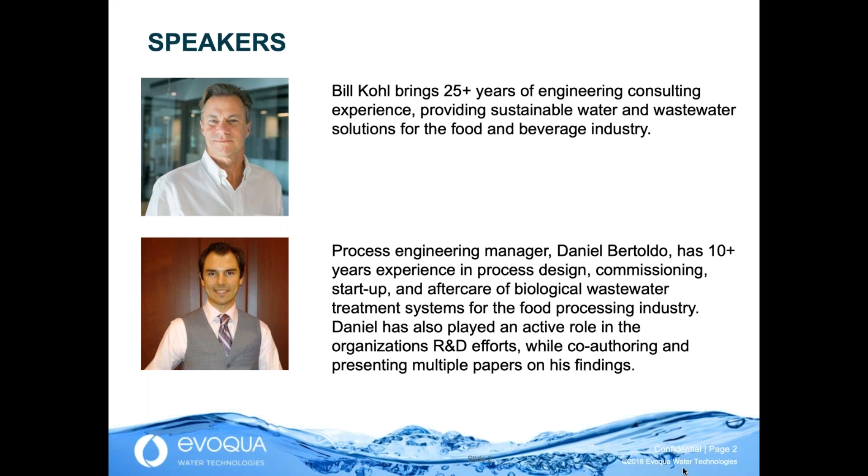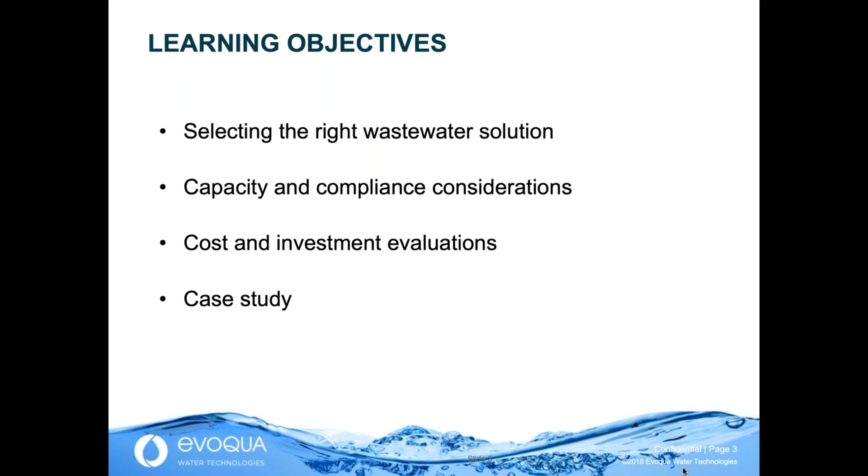Over the course of this presentation, we're going to try to offer you some thoughts on evaluating wastewater treatment options and finish with the aforementioned case study for New Belgium Brewing. We're going to presume that you have a basic understanding of wastewater treatment, and for those of you that have more than a basic understanding, please forgive the oversimplifications that we're using for the illustrations today. We're going to be discussing wastewater technologies only at a very high level. The intent of the presentation is to give you some concepts and some ideas on how to select what's best for you in your situation.

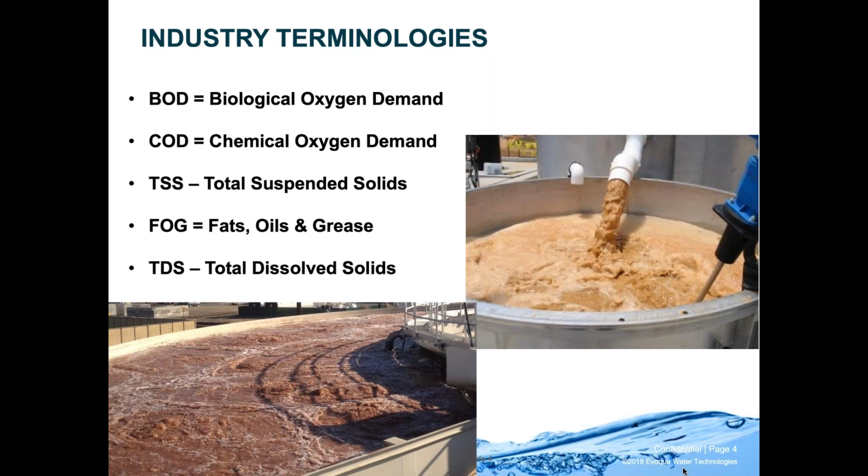Just briefly, I'm assuming that most people on the call understand this terminology, but here's just a little reminder of some of the acronyms that we're going to be utilizing today. So wastewater, I think most people are aware that it has these following impacts. Unfortunately, it's not the favorite topic for investment purposes in a facility, and that's understandable. You want to invest money in the production side of things, not the wastewater side of things. Often it's only dealt with after it needed to be, so you're already struggling with the wastewater treatment issues if it's an existing system especially.

So we're going to give you some thoughts on how to basically evaluate costs when looking at a new system or an existing system, how to extract whatever savings you can from the treatment systems and become a hero, take the savings, turn it into a bonus for you.

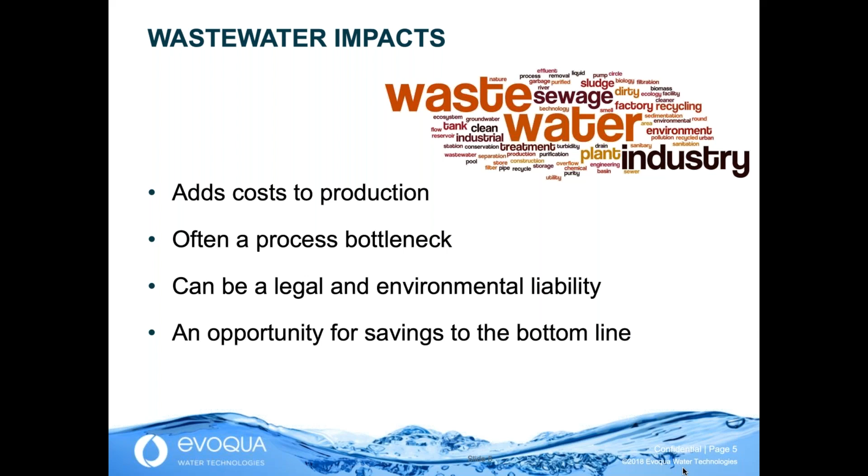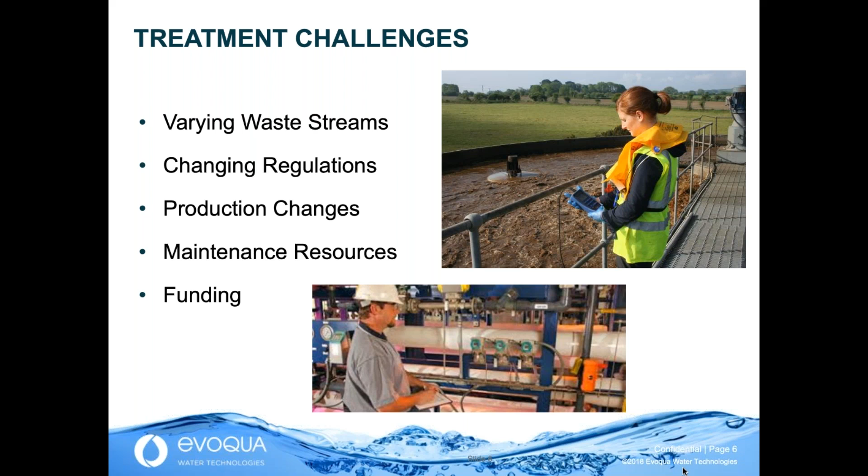Now, with wastewater treatment plants and food processing facilities, there's a variety of interesting challenges. The production changes, there's CIP cycles, there's unknown spills and chemical additions when something is changed in ingredients or sanitization chemicals, and of course, getting funding to make any improvements is a challenge as well. We're going to try to help you with some of these things.

So when you're evaluating options, basically you've got a new installation or you've got existing installations. We're going to try to address both of these, but which one you have makes a difference in how you look at it. Obviously, a new installation, you can do things right the first time.

Existing installations, you may be constrained by what equipment you already have or what the site conditions are. There may not be space, etc. In addition to that, there's a growing emphasis on operations as well, making the operations as efficient as possible as far as byproducts, waste, energy, labor requirements, things of that nature. So we'll talk a little bit about automation and a little bit on outsourcing some functions that may be specialty, so you don't have to know everything about your wastewater treatment system, just enough to keep it running each day.

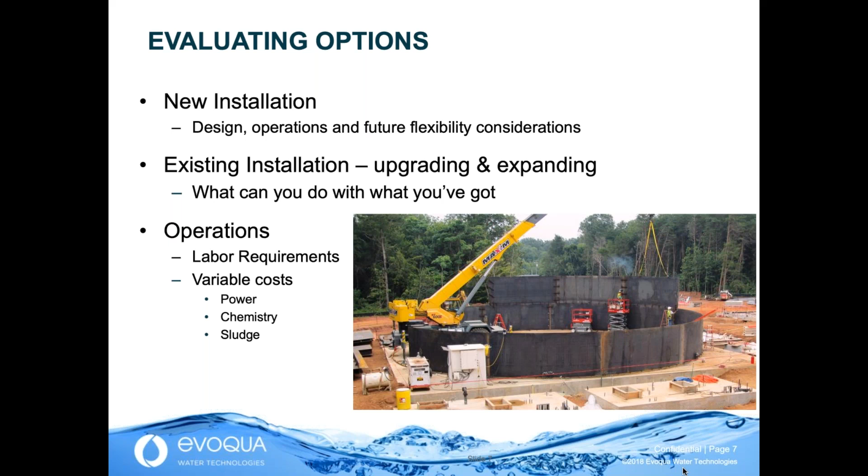So design considerations are going to take into account things like where are you discharging to? Is this water going to a municipal wastewater sewer? Is it going to a surface water discharge? How much room do you have? Is this going to be a facility that has the potential to grow in the future? What kind of product change-ups are you going to have? And of course, it comes down to money as well. What money do you have available? What labor do you have available?

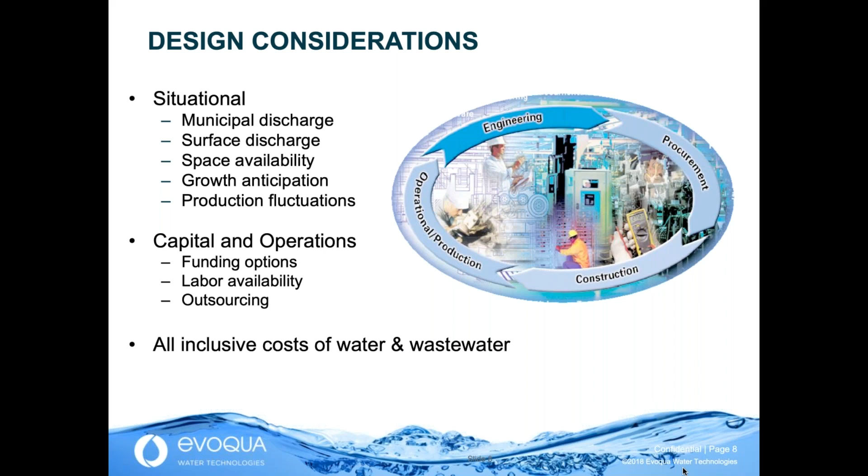That's increasingly tight. Are there some considerations where you might be able to outsource some or all of the operations and the capital equipment? Where we start with all of that is trying to recognize what are all the costs that are going to be associated with the water and or wastewater treatment system. So on that front, the more data that we can collect before we start evaluating wastewater treatment systems, the more informed and better choices that you're going to have. So things like a mass balance throughout the facility, wastewater analytical data, obviously. Operational costs at the various steps where you're modifying the water, impacting the water in some way.

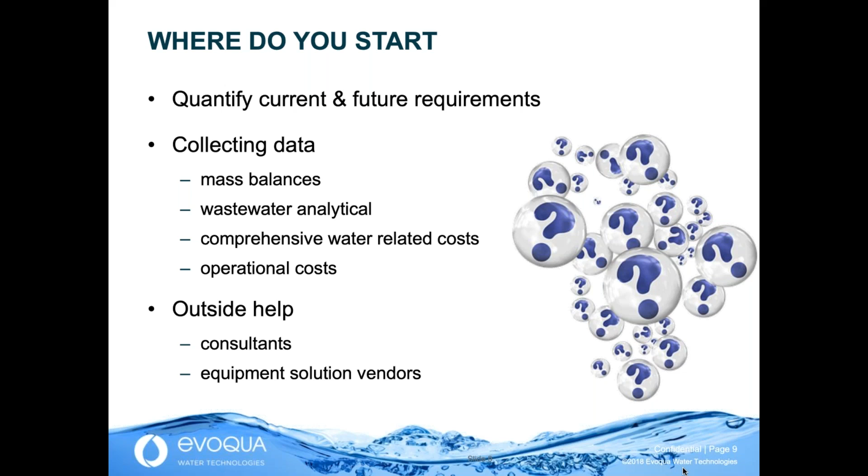And you're not expected to know how to do all of that or where to look. So there's a lot of help outside available to you in the form of consulting engineering firms. Equipment solution vendors can do a lot of this as well for you, and sometimes they're teamed up with the consultants to help provide you the data and the information you're going to need to justify what's best for your facility.

So when we look inside the plant, many of you will recognize that water is everywhere. But everywhere there's water, there's also a cost associated with this. Anything from adding heat energy and chemicals at the boiler treatment steps, or the cooling towers, also a chemical treatment, and there's a lot of wastewater that comes out of a cooling tower, things of that nature. Also the lab.

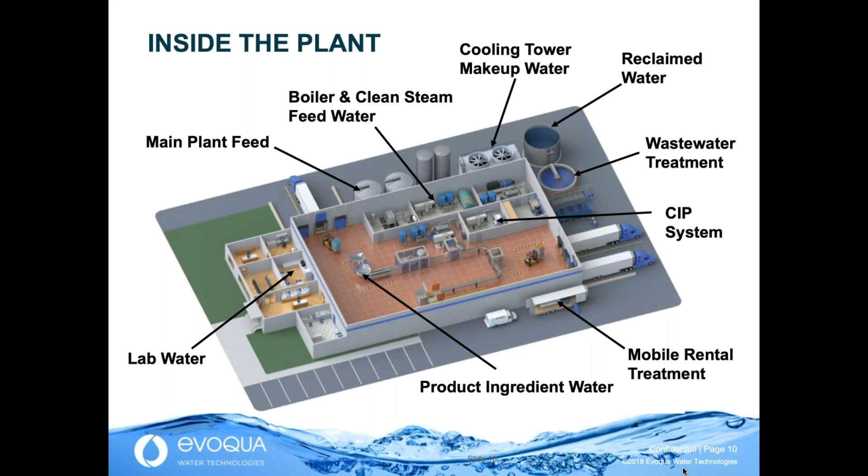So if you look in more detail within your facility and start blocking off the major water users, the major destinations for the water, the uses of the water, the ultimate disposition of the water, and the byproducts of the water, this is a good template to utilize to say, okay, these are the areas that we need to at least take into consideration for what's the cost of my water at each of these steps, and where are there water reuse opportunities. It might be point source water reuse.

For example, we could take the cooling tower blowdown water, treat it, send it back to the cooling tower again, and avoid having it go to a wastewater treatment plant, ultimately shrinking the size of the wastewater treatment plant. Why would you want to send cooling tower water to a wastewater treatment plant if you could avoid it? That takes a lot of volume out and potentially a lot of cost.

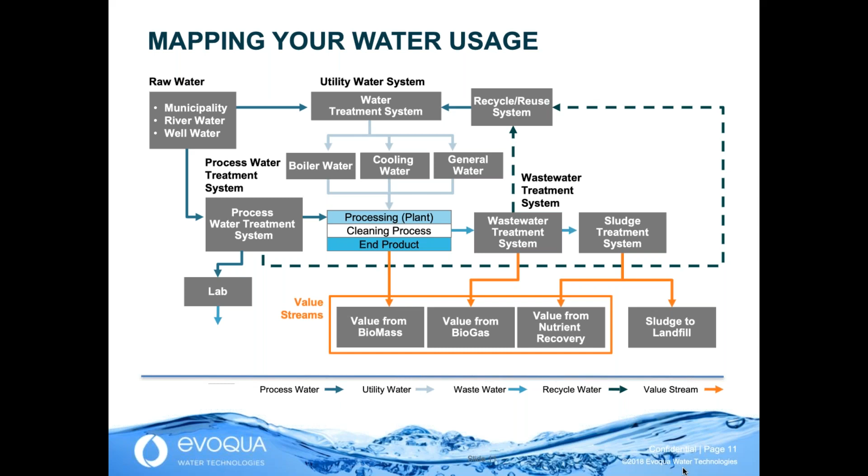So when you're looking at the cost, just to reiterate, look at all of the aspects of the water coming in, the water going out, not just what the meter says on the front end and what the sewer bill is on the back end, but add in the other costs, including labor associated with these various steps. And this will give you a comprehensive picture when you're justifying the type of wastewater treatment system you're going to use.

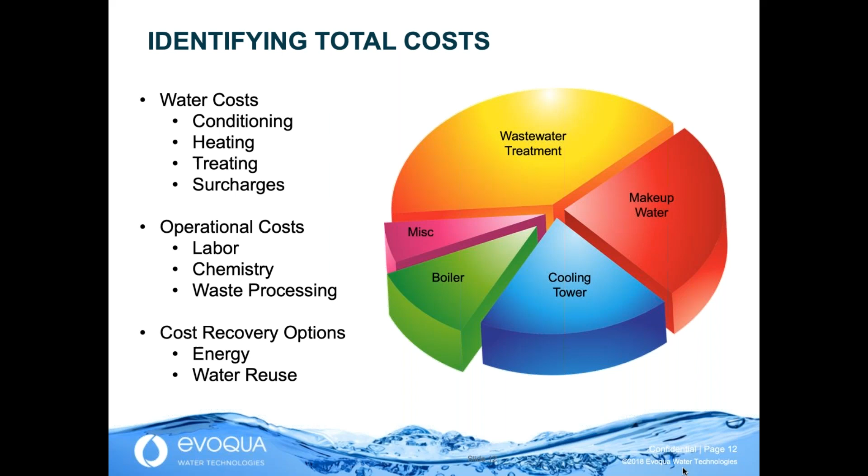We keep talking about the type of wastewater treatment system, but in reality, there's a large number of technologies that can go into a water and or wastewater treatment system. Unfortunately, or fortunately, most of them will work to get you to where you need to be.

There isn't one solution, unfortunately, that fits everybody. It's a little easier on the front end process water side, but on the back end, on the wastewater side, there's so many different variables that have to be taken into account in the constituents in the water, the temperature of the water, the fluctuations of the water flow, et cetera, that there just isn't one size fits all.

So since there isn't one size fits all, we're going to try to give you some examples on how to compare the various options to make the best choice for yourself. And it won't be the same for every industry even. It's really site specific, it's client specific.

So we're going to talk about some of these technologies, but we're not going to go into detail on any of them. This isn't about how these technologies work. It's more of, here's some different examples of what would work in a given situation and how we compare which one is potentially best for you.

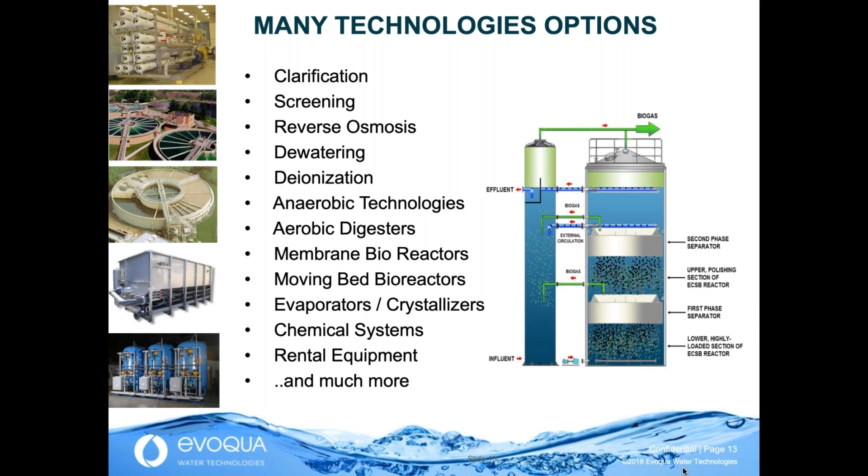So I'm going to break these down into real basics. All those other technologies that were on the previous slide can generally go into these four categories. There's physical processes, which are things like screens or dissolved air flotation, media filters, membranes, things that are basically physically taking solids out of the water typically.

The biological side of it is taking out the dissolved organics that the physical processes don't really impact. So essentially, this gets digested by microbes. We're going to get into that in a little bit more detail, and that's going to be the focus of a lot of the rest of our discussion here.

The chemical side, almost every aspect of the wastewater treatment is going to have some chemistry associated with it, whether we're adjusting pH or doing coagulation or doing sterilization on the back end. So you can't avoid having the chemical impact on any of these.

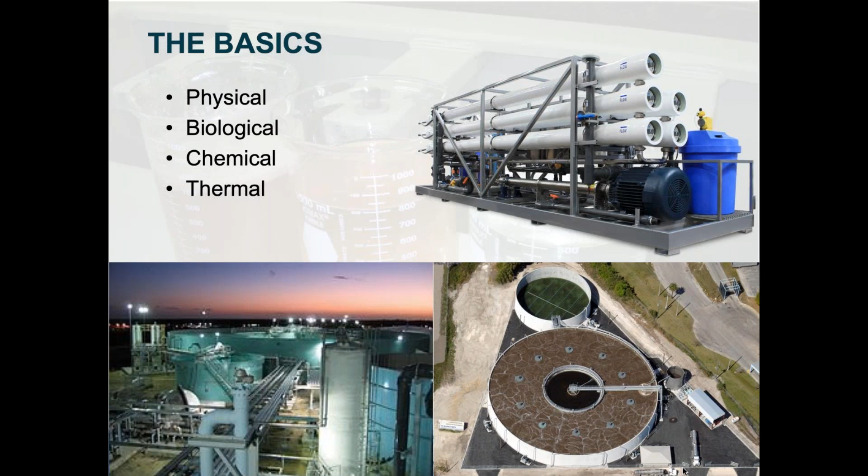Thermal is a bit more on the extreme side. This is basically boiling off the water to eliminate it. So we're concentrating it into a liquid form, or we could take it all the way to solids. Generally not applicable in food and beverage, so we're not going to focus on that, but I just want to make you aware that it is there.

So if we go back to where the different technologies may fit and how to categorize them, we could take a look at this as a primary treatment step, a secondary treatment step, and a tertiary. So the primary is where we're going to be filtering out solids, if we just keep it that simple. The secondary side is where we're going to take it a bit further, and we're going to digest or eliminate dissolved organics for the most part.

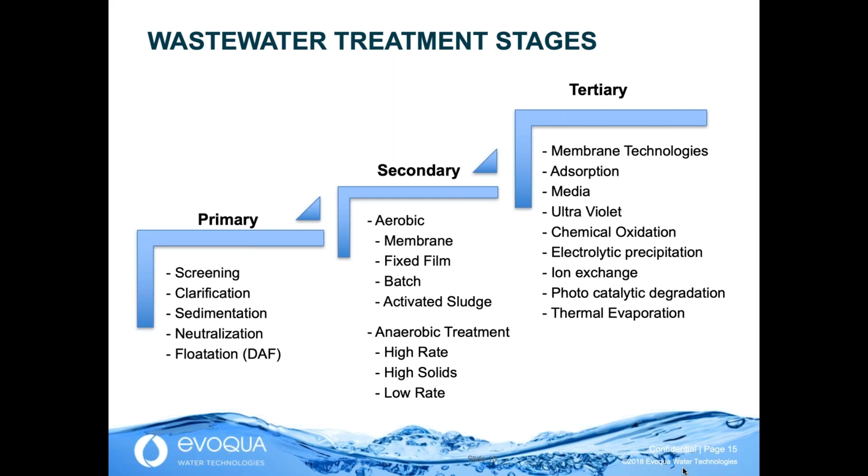On the tertiary side, this is where we're polishing it up. We're either polishing it up for discharge, for reuse, maybe some other beneficial side use, but it's a polishing step. We're not going to spend a lot of time on this today either. We're going to focus on the secondary part, the heart of this, because that's where the biggest impact is financially, footprint, every other aspect of the wastewater treatment plant. Most of the heart of that's going to be the secondary side. So that's what we're going to focus on today.

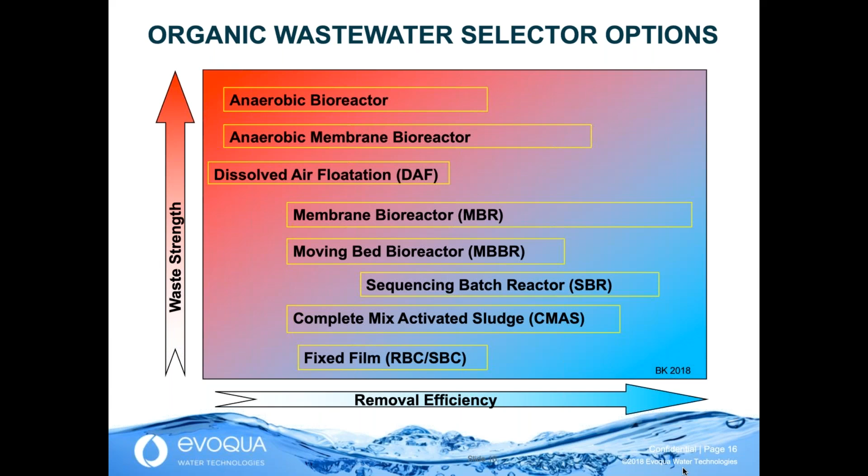And as we go down and to the right, where the cleaner water is, we've got more aerobic or membrane-based systems. And in between there, you'll see that the dissolved air flotation has a spot as well. And you'll see why in just a moment.

I'm going to talk about the primary treatment step. This is going to be part of almost any other process that has the secondary or the tertiary. But often a primary treatment step can be all you need for your wastewater treatment needs if you're going to a city discharge. So primary treatment, taking out suspended solids, but it also takes out biological oxygen demand, organics that are associated with the solid portion of what you're removing.

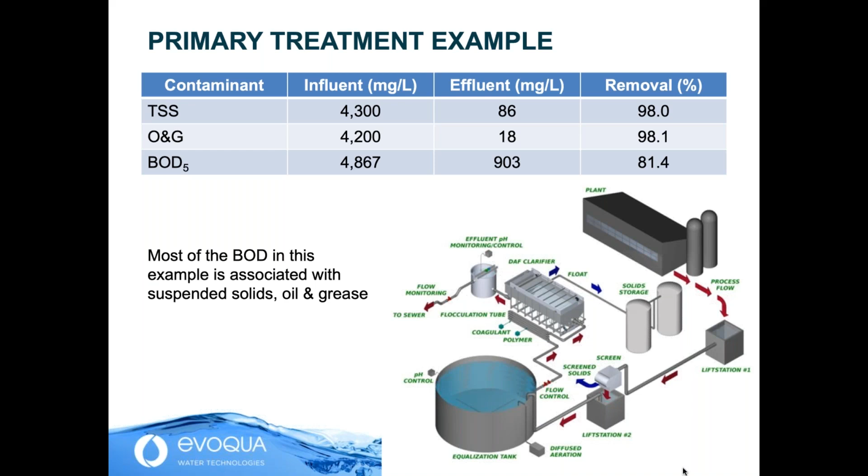In this particular case, this was enough to meet city discharge requirements and, maybe more importantly, save a tremendous amount of surcharges that the city would have been impacting this particular facility with if they had been sending raw wastewater to the drain. So these types of systems typically have a pretty good payback. So if you're not executing something like this now, this is probably the best thing to take an initial look at. These can have a return on investment as short as a year and usually within 2 or 3 years. Fairly simple to operate.

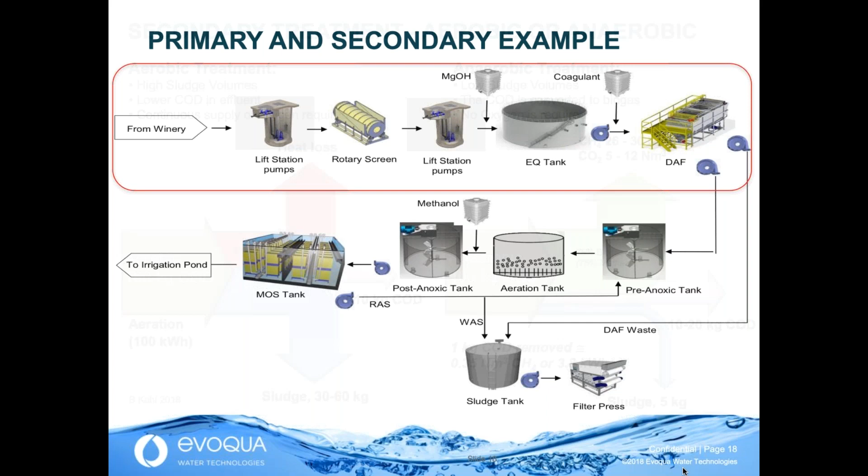These 2 steps would be the workhorse for almost any wastewater treatment process for the food and beverage industry. We're going to focus on the secondary for the remainder of this presentation, since that's where most of the money and most of everything is being spent and utilized. So I'm going to talk a little bit about 2 basic types of secondary treatment on the biological side. We've got the aerobic, which, as its name implies, uses air. And essentially, we are taking aerobic microbes, giving them food and air in some type of a tankage. We've got them contained. And what they're doing as a result is they're consuming the soluble organics and turning it into sludge and turning it into carbon dioxide.

The other approach is anaerobic. Anaerobic doesn't require air, and as a result, it doesn't require as much power. And as another consequence of anaerobic technology, it also produces a lot less sludge, and it produces a beneficial biogas. It's beneficial if you can reuse it in boilers or produce electricity or a number of other uses we won't get into at this time. But the reason I bring these up is we're going to compare these in a couple of examples coming up here on how to decide what's best for you.

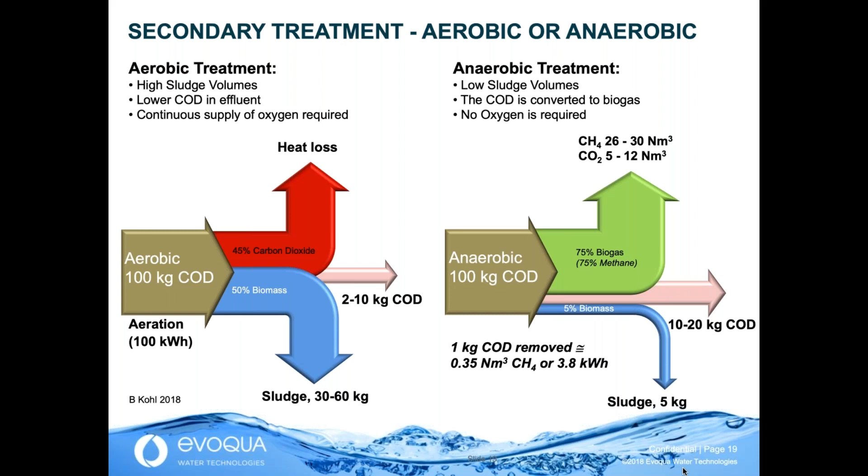A variation of that, especially for industrial applications these days, is something called a moving bed bioreactor. It's basically a fixed film. It just means that we're now pouring places to live for those microbes into the same type of tank as the conventional activated sludge. So think of honeycomb cereal being poured into a big tank, and now biofilm can form on those surface areas, allowing a much denser population of aerobic microbes.

And the benefit for an industrial application is now we can make this more compact. And we don't have to send the bugs back from the clarifier back into the swimming pool because they're already hanging on that fixed film media. We still need some type of clarifier or dissolved air flotation at the end, and we'll see that in upcoming block diagrams, just to capture the dead bugs, because we don't want them going down to the next step in the process, whether it's going to the sewer or tertiary polishing.

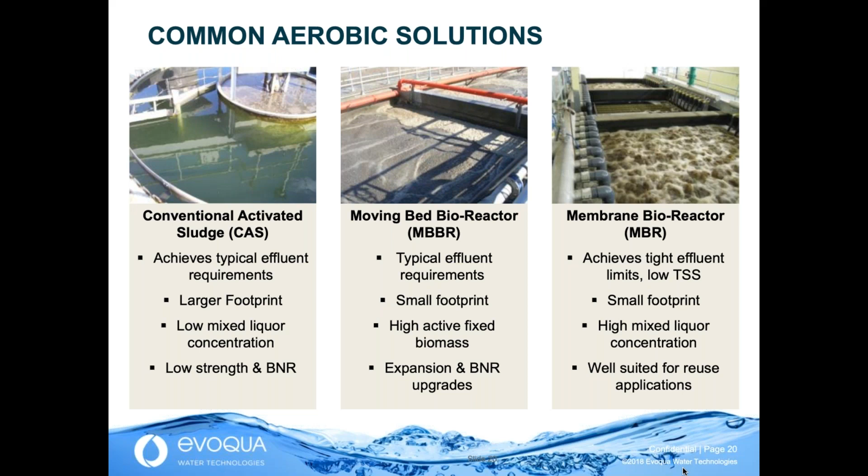And then another variation of this is just to put a membrane where the clarifier or the DAF would be. So now you've got that open swimming pool concept, but instead of a clarifier or a DAF, you've got a membrane that's holding all the bugs in. And as a consequence, we can keep more bugs in a smaller space. So like the MBBR, this is also a smaller footprint than the conventional activated sludge. A little bit more expensive because of the membranes, but you get better quality water that might be more suitable for reuse, and we're going to talk about that in a little bit.

On the anaerobic side, again, an oversimplification. We've got high rate anaerobic, and what that means is that the water retention in that system is a very short period of time, usually just a few hours. Consequently, it's a very small footprint. It has to have the water very conditioned in order for this to work, meaning we can't send it high solids, oil and grease, things of that nature. We need to control the operating parameters within a very narrow range. So it's not very forgiving, but it's very compact. And if you don't have space, that might be your only choice.

If you do have space, a medium rate reactor where the water retention time is longer can handle higher solids, higher FOG. It's more forgiving, a little bit easier on the operation, but we have to have something to catch the solids like the conventional activated sludge and send them back into the process.

The low rate system takes a larger footprint because it has a higher retention time, but it's the most forgiving of the three. It can operate in the broadest range of any of those anaerobic technologies, including taking high fat, oil and grease, high suspended solids. It often can be the only step in the process, not requiring any pre-treatment, not requiring any post-treatment like a DAF. So we're going to talk about that a little bit further.

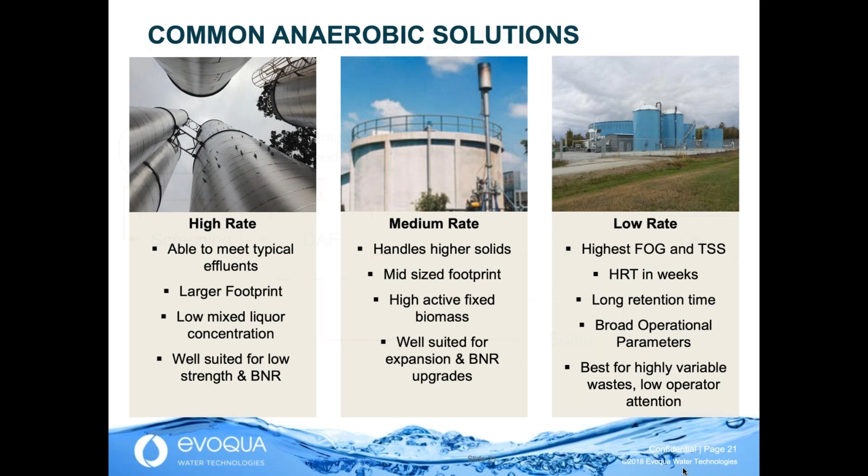So if we go back to the primary expansion or primary treatment that we talked about before, that a lot of existing facilities may already have, especially for a city discharge, that included the screen and a DAF, an oversimplification here. Often what will happen is you've increased capacity at the plant or production. You're no longer meeting the city requirements, or the surcharges have increased, or the limits have dropped. So what can we do?

The good news is you can add one of those processes, in this case an aerobic MBBR, the moving bed bioreactor, followed by a DAF, and certainly meet the city discharge limits. It might be a new phosphorus limit that they've imposed for you, or they've lowered the level at where they're going to start charging surcharges, or they're just asking you to reduce because they need additional capacity within their facility. So they're asking the industries to do further pre-treatment. This is a relatively simple add-on. These are typically modular, so you can expand them in the future.

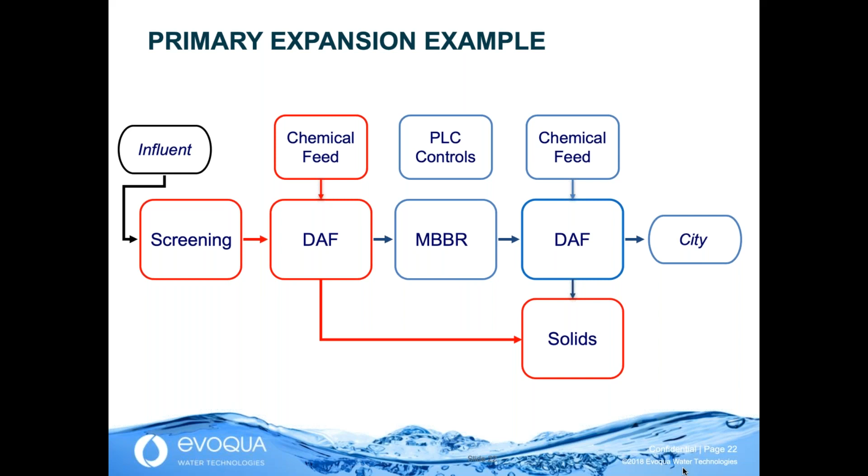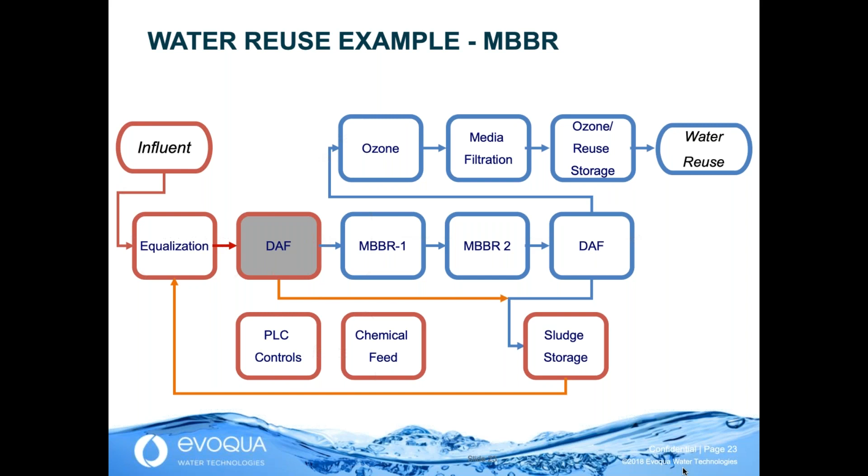An easy choice. If you wanted to take that concept a bit further and reuse some of that water that you're now cleaning up, we could further polish that water with an additional moving bed bioreactor, followed by the DAF that we had in the previous example, but at this time now start sanitizing it with some ozone, use some media filtration or a membrane to further clean the water, and then use it for reuse. Could be boilers, cooling towers are commonplace, truck washes, things of that nature.

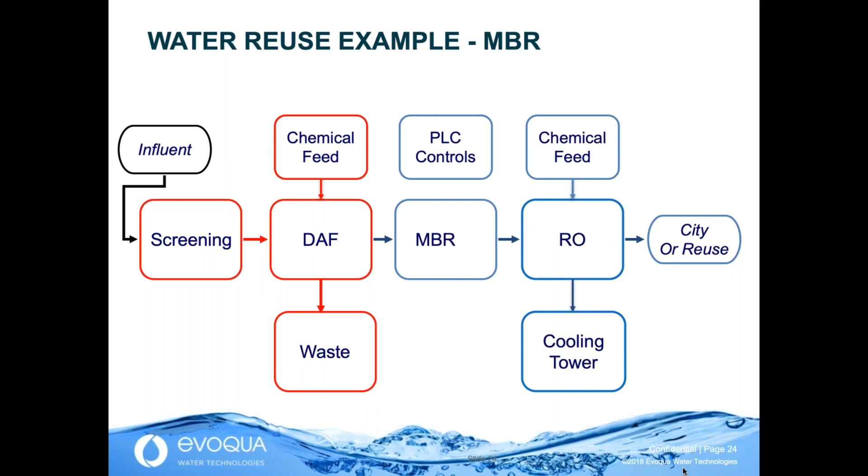Another example of that would be to utilize the membrane system, the membrane bioreactor. This allows you to utilize the water directly to an RO, for example, which would be very suitable for almost any use within the facility.

Now let's take a look at those three on a comparison chart, just in some very basic aspects: their footprint, the amount of sludge they produce, and the energy required to operate each of them. There's certainly a lot of other factors to consider, but if we just kept to these three for illustrative purposes, you can see the total area in yellow above there that the MBBR, in this case, the moving bed bioreactor, actually has the smallest footprint. Okay, big plus for that.

The membrane bioreactor comes in next. The conventional activated sludge is always going to be the largest because, again, remember, it's that big swimming pool followed by a big clarifier to catch the bugs and send them back. So we need a lot of room.

The second thing we're looking at here is how much sludge is being generated. The amount of sludge generated is going to translate directly into a cost because obviously that sludge is going to have to go somewhere. Typically it gets dewatered, and the extent of dewatering really depends on the disposition of the sludge. Is it going to be land applied? Is it going to go to a landfill? Are you going to incinerate it? Those are all factors that add some variation into what might be best for you.

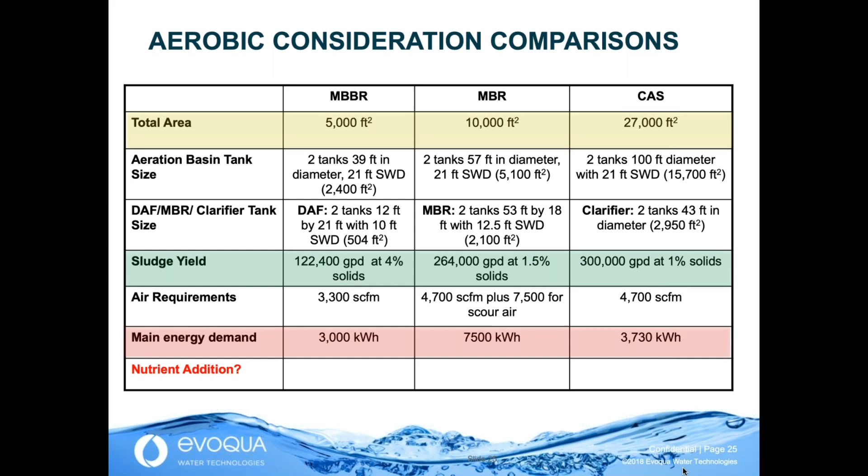And then, of course, the power consumption. You can see that in this case, the MBBR came out a little less than the conventional activated sludge on the right. The membrane bioreactor has more; there's more pumping involved in a membrane bioreactor, and there's some scrubbing involved. That involves input of a blower typically.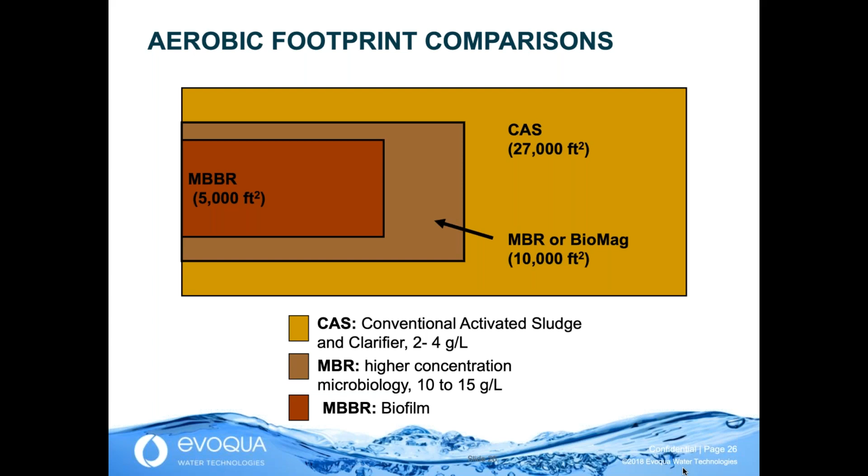Also, when you just compare the footprint on a very simplistic basis, this is what it looks like visually. So in this case, this particular client was looking at initially putting in a conventional activated sludge. Until they did the comparison, they ended up putting in the moving bed bioreactor. They might have gone with the membrane bioreactor had they had an advantage for water reuse, but in this case, they did not.

So let's look at another real-life example that might be relevant to some of you. There's a client that has a 70,000 gallon per day discharge going to a city. They've got an influent to whatever the treatment plant would be of about 1,500 ppm of suspended solids. The city is going to require 300 ppm. The influent BOD is 6,000. The city is requiring 500.

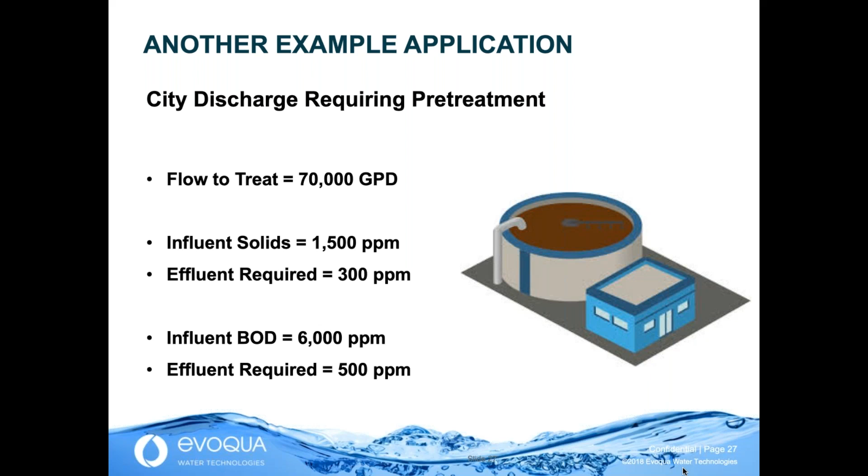In this particular case, the city wasn't giving them a choice. It wasn't that, I'll keep discharging and we'll just charge you surcharges. The city is a smaller municipality. They needed the capacity, so they didn't have to invest in expansion themselves. So they're going up the pipe to this particular industry and asking them to do some additional pretreatment. So they too looked at three particular options for meeting those discharge requirements.

So here's the familiar moving bed bioreactor in a little more detail than the overly simplistic one we looked at earlier. So we've got an EQ tank. We've got the reactor tank, a 55,000 gallon tank you see in the middle. Then we've got the dissolved air flotation to collect the sludge, and none of that has to be recirculated back to the MBBR. It's one of the advantages of that. And then we're dewatering that sludge, and I don't remember what the disposition was, but you could see in the chart in the lower left-hand corner that this is where the performance is coming in with this particular technology.

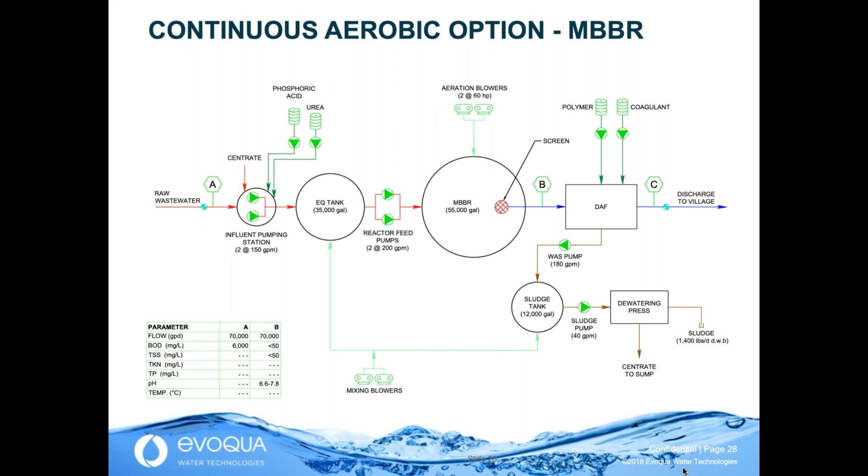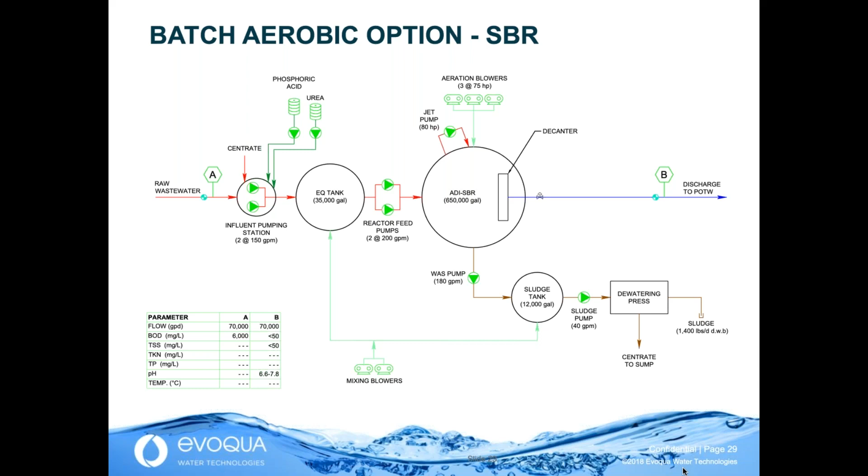And we're going to compare that now to one of the other technologies. In this case, it's a sequencing batch reactor. A sequencing batch reactor is very similar to the conventional activated sludge, except it's happening in batch form instead of a continuous form. So when we look at this technology, we would compare it with a conventional activated sludge. Much larger tank, similar performance.

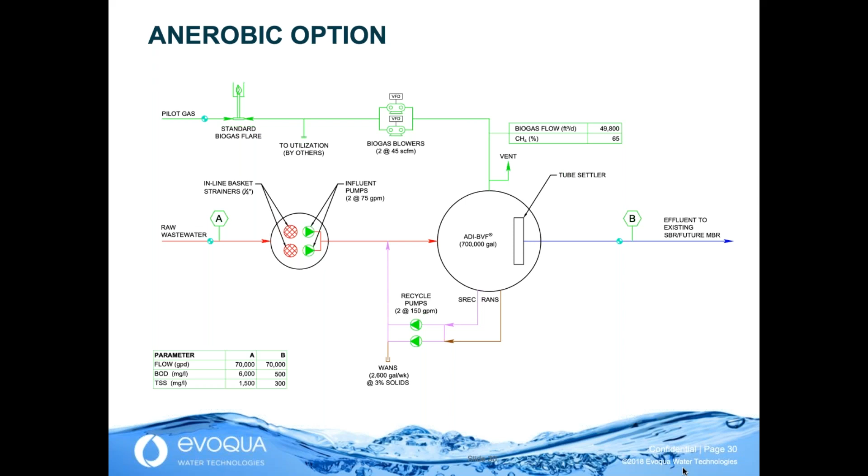And then we also compared anaerobic in this case. And the anaerobic system you can see is the simplest of the three, but it requires a 700,000 gallon tank. In this case, the client had the room for it, so they took it into consideration. Performance characteristics not quite as good as the aerobic, but in this case, good enough for what the city is requiring.

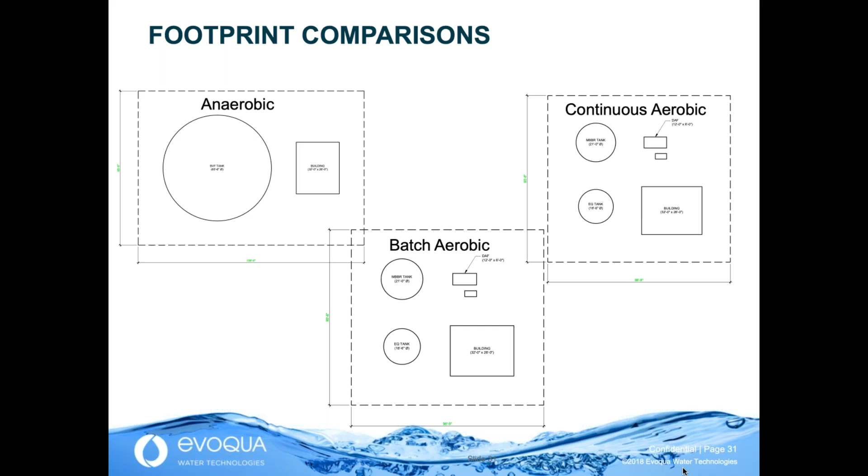The other thing, of course, to take a look at is the footprint of these three technologies, and we can see here that the footprint, you can't read the small print, but trust me, the footprints are relatively the same. The anaerobic in the upper left-hand corner is basically a tank. The batch aerobic is several tanks and a DAF. We need some equalization in this case. The same with the MBBR over on the right.

More importantly, we looked at the operational costs in this case. So presuming that the operator attention is the same for each of these on that upper row, we looked at the electrical requirements, the chemical requirements, and the sludge production to give them, again, an overly simplistic operating cost, not taking everything into account, but taking just the basics.

So if we take a look at the anaerobic in this case, which is what this particular facility selected, their electrical requirements that we've highlighted in yellow here came in far less than the two adjacent ones. You know, we don't have the blowers, so we don't have that electrical cost.

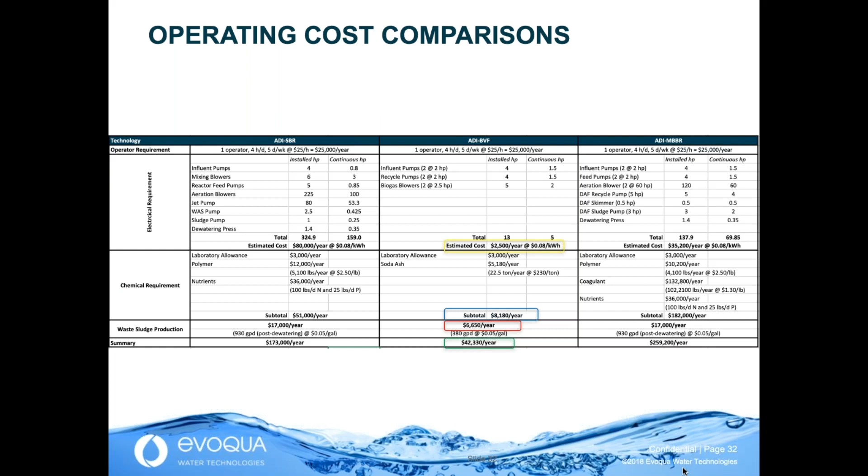Now, the anaerobic system isn't going to win out in every case, but in this particular one, the benefits that this particular client saw was a lot less sludge, a lot less power. They're going to utilize the biogas for their boilers, so they're getting a CO2 offset, and they're getting the value of the saved natural gas. They also liked the fact that it was a very stable process with a large turndown capability. They have outages and they have product mix changes. An anaerobic system can be turned off for weeks at a time. An aerobic system has to be continually fed even during outages.

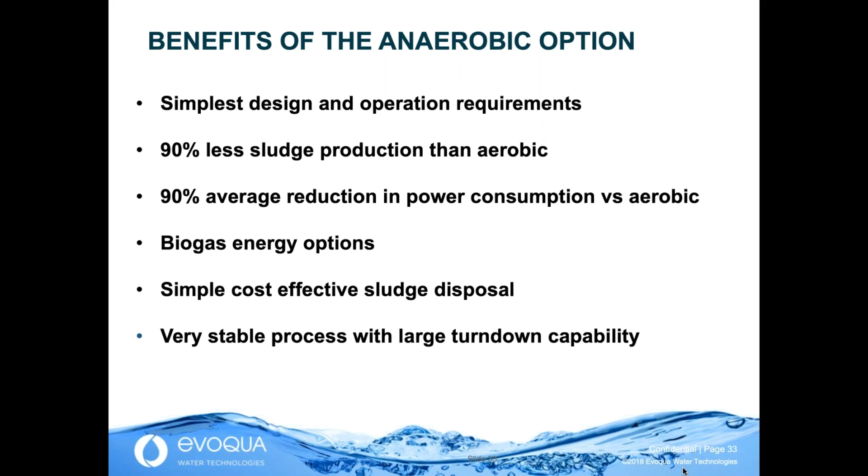So while we're talking on the anaerobic technology, it's also being more and more commonly used to increase the capacity of an existing conventional activated sludge. So if you already have an aerobic system, not just a conventional activated sludge, but any type of aerobic system, and it's reached its capacity, or it needs to handle more future capacity, or it needs to reach tighter surcharge limits, or you just want to reduce the amount of sludge being produced and lower your operating costs, an anaerobic can be a good add-on solution. This can be added in front of the activated sludge system to then reduce the load on the activated sludge system and consequentially the operating costs in terms of 80 or 90%. So 80 or 90% less sludge, potentially 80% less power, et cetera.

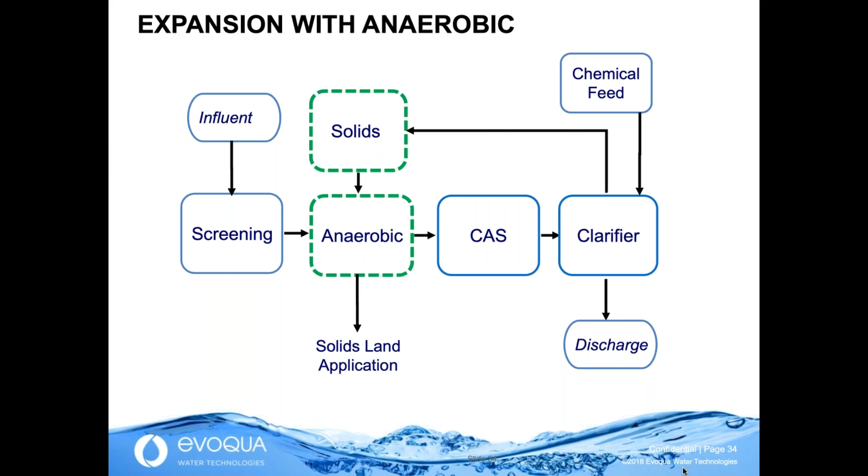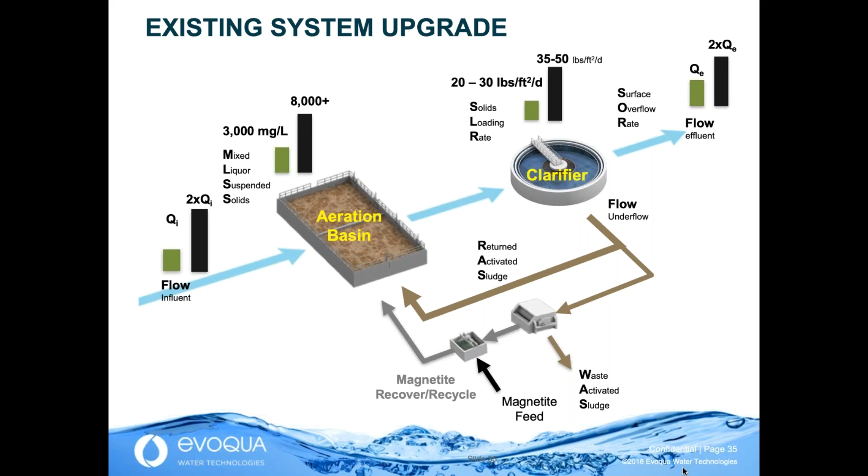Another opportunity to upgrade an existing activated sludge system is to turn it into a ballasted system. I'm not going to discuss the technology here so much as to make you aware that if you have a system now that's overloaded or nearing that, or you need to get better quality water out of it, or your clarifier keeps puking up sludge because it's getting overloaded, you can add on a relatively small technology that doesn't increase your footprint, but it can double the capacity of an existing system, and it can more than double the quality of the water coming out as well. Just another thing to consider with whoever you're dealing with that's going to help you review your wastewater treatment system.

And then finally, just kind of wrapping up here, once you've cleaned the water to a certain degree with a secondary system, you can add a tertiary treatment and take the water to whatever level of reuse that you might want or discharge that you may want. And this is just one example of several ways to do that.

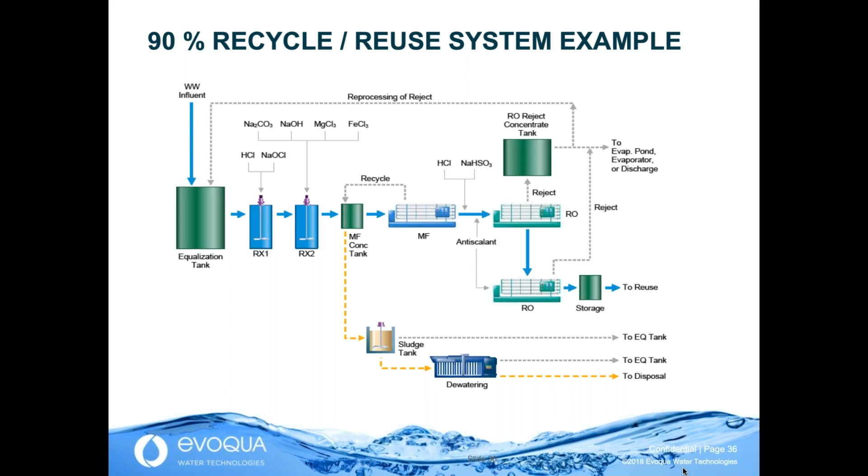So just wrapping up, what we would encourage you to do, first and foremost, is collect as much data as you can, and trending data as well. Anything that you can get over the course of days, weeks, months is helpful to whoever's going to be helping you with the evaluation of your wastewater treatment system. Also, always compare multiple options. Sometimes doing nothing is the best option, but compare as many options as you can afford the time or expertise to do. Evaluate the capital and the operating costs. A lot of people get lost in the capital costs and neglect really detailing out the operational costs.

Make sure you get operation or process guarantees on whatever you put in. This can be tricky; there's a lot of suppliers that could supply you something that might work for a little while, but that ends up not working in the long run for you. So make sure of your source on your process guarantees. And then we always want you to look at modularity.

If you need to expand this thing, how would that look? And maybe build that in up front if you're putting in a new system or expanding an existing system. And then, of course, where are you going to get your service support? That newfangled thing that you bought from Australia, where does the service come from for that if something happens with it? So think about where your service is going to be, how it's going to be serviced, maybe even consider outsourcing some of those services or even in the operations.

With that, I'm going to turn this over to Daniel, and he's going to describe a case study with New Belgium Brewery. All right, thanks very much, Bill, and thanks everyone again for attending this webinar. And I'm pleased to discuss this case study on the on-site wastewater pretreatment system installed for New Belgium Brewery in Asheville, North Carolina. Next slide, please.

So New Belgium Brewing Company is one of North America's largest craft brewers, and they pride themselves on producing high-quality beer under environmentally and socially responsible policies. So the success of their brewery in Fort Collins, Colorado, allowed them to expand to a new brewery in Asheville, North Carolina, which has the capacity to produce 500,000 barrels of beer per year. So the company elected to conduct on-site wastewater treatment at the Asheville Brewery in phases.

So phase one consisted of installing an equalization tank so that the brewery wastewater could be equalized and pH adjusted prior to discharge to the Buncombe County Municipal Treatment Plant. And then phase two consisted of installing a biological treatment system to pre-treat the wastewater to significantly reduce the organic load being discharged to the sewer. Next slide, please.

So New Belgium is a progressive company, and they spent significant time and resources researching technologies to find which solution would be the best fit for their brand. So in addition to evaluating the pros and cons of various treatment approaches, New Belgium wanted to select a technology which they could be proud of and would adhere to one of their core values and beliefs, which is environmental stewardship, honoring nature at every turn of the business.

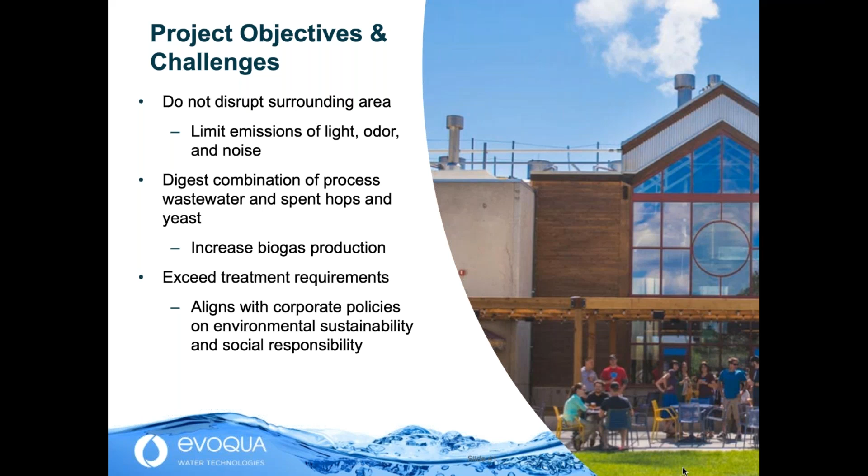Additionally, New Belgium sought a technology which would digest some of their spent hops and yeast to increase biogas production, as waste diversion and biogas utilization aligned with New Belgium's environmental and sustainability policies. Furthermore, New Belgium did not want to just meet the discharge limits. To fully adhere to their core values, they wanted to consistently generate a very high quality final effluent, which far surpassed the treatment requirements. So after taking all of these challenges into consideration, New Belgium determined that anaerobic membrane bioreactor technology would meet their requirements for environmental sustainability, social responsibility, and integration with the local community.

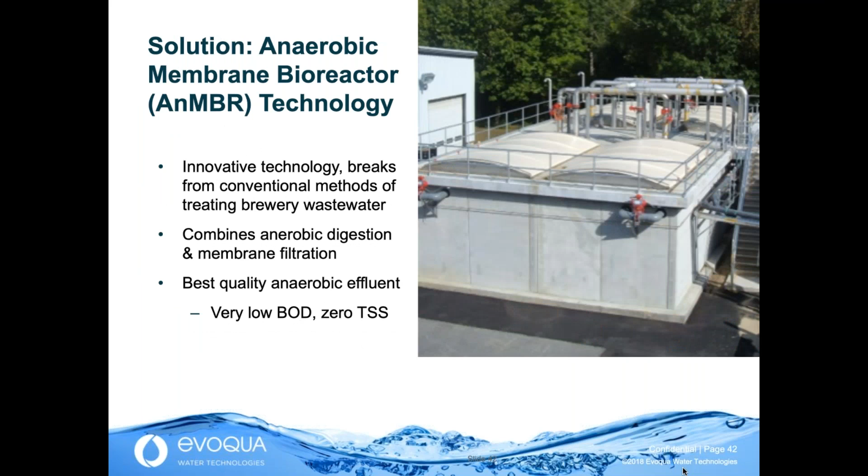The anaerobic MBR process itself pairs anaerobic digestion and membrane filtration into a single treatment stage. So the primary advantage of the anaerobic MBR technology is the ability to provide near perfect solids retention and generate anaerobic effluent free of suspended solids. The membrane barrier retains all the biomass within the system, which ensures efficient treatment and stability even under high organic loading conditions. The physical membrane barrier results in a more reliable method for biomass retention compared to strategies used in alternative anaerobic technologies.

So the combination of complete mixed conditions in the biological treatment system, operation at high biomass concentrations, and near perfect retention of solids allows anaerobic MBR technology to strike a very good balance between high biological stability and process efficiency and compact system footprint. The anaerobic MBR system generates the best quality effluent among all commercially available technologies, which aligned with New Belgium's desire to generate effluent which far surpassed the treatment requirements for the municipal discharge.

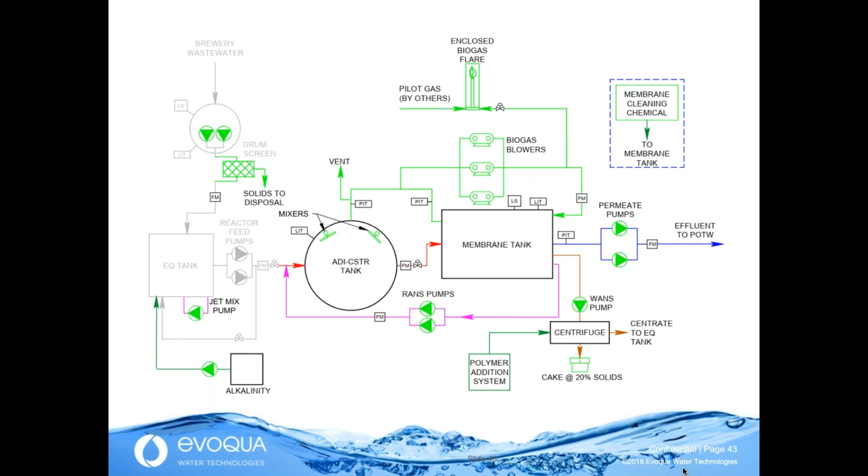The CSTR and the membrane tank were covered to prevent odor emissions, and the biogas blowers were equipped with enclosures and silencers to ensure noise emitted from the treatment plant did not exceed max noise levels at the property boundary.

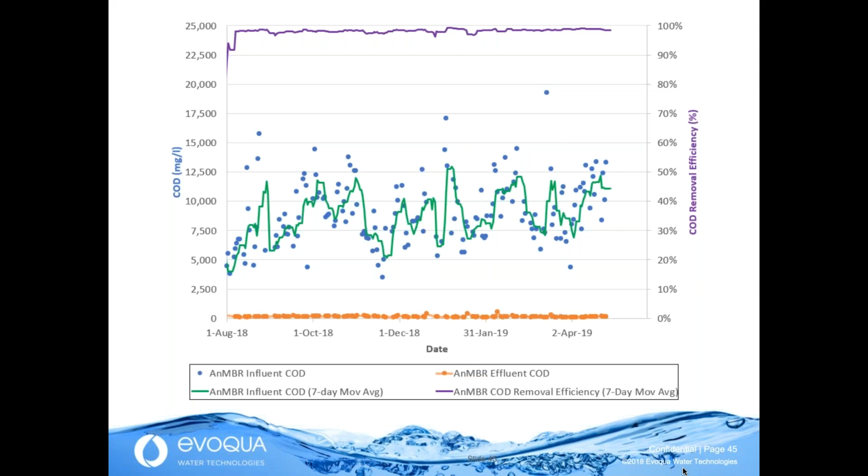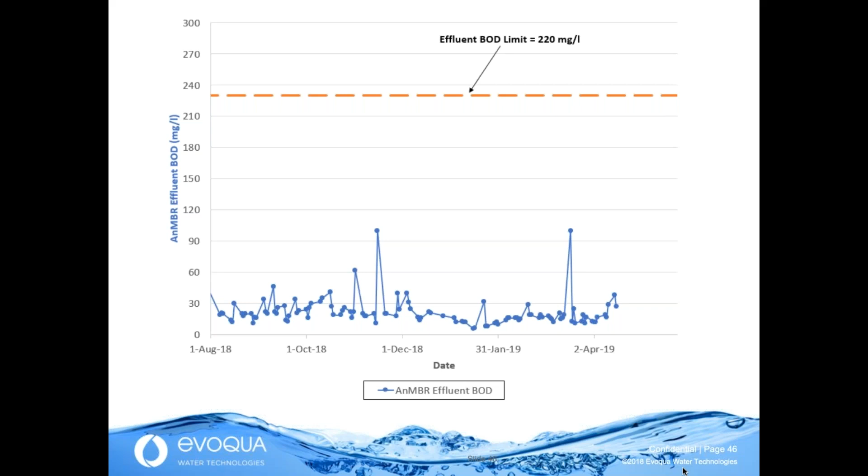So by going against historical convention and installing an anaerobic MBR system for on-site wastewater pretreatment, New Belgium have adhered to their core values on environmental stewardship. The level of treatment achieved by the anaerobic MBR system when treating the combination of processed wastewater and spent hops and yeast far exceeds the requirements for discharging to the municipality, which aligns with New Belgium's commitment to waste management. The treatment plant does not impact the aesthetics of the surrounding residential area or the brewery, which benefits the

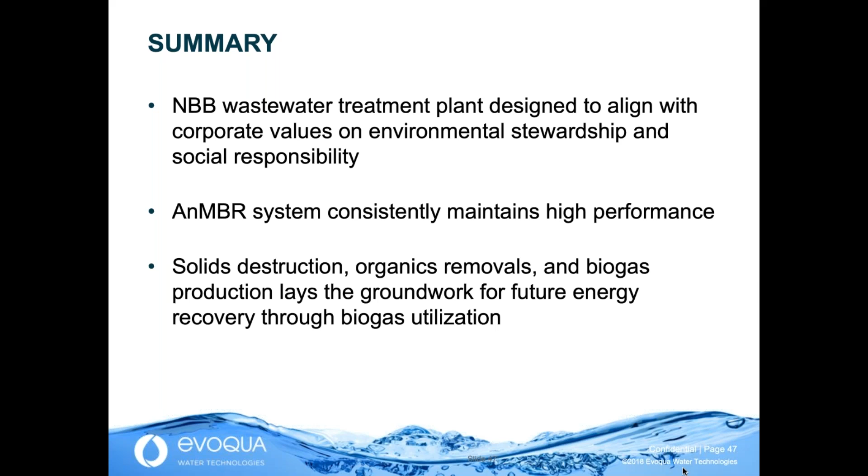local community. And the consistent performance of the anaerobic MBR system in terms of solids destruction, organics removals, and biogas production lays the groundwork for future energy recovery through biogas utilization, which will be conducted in the third phase of the wastewater treatment project. And that concludes the case study on the New Belgium system, and thanks a lot for your attention.

Okay, so now we'd like to take some questions from the audience, gentlemen. The first person says, I thought anaerobic treatment was just for high-strength waste. Bill, can you comment on that? Sure. Yeah, it's a common understanding, maybe misunderstanding, that you need very high strength waste before you can consider anaerobic, and it's really much more circumstantial than that.

There's a wide band of crossover between anaerobic and how far it goes into the aerobic treatment realm. A lot of it depends on the constituents of the water, obviously. So don't rule it out. Anything that you're looking at initially, ask if anaerobic is a consideration and throw it into the mix so you can compare it. There's certainly a lot of advantages to it.

Okay, our next question is actually a two-parter. The person says, operationally, how do the three solutions you discussed compare, and do they all require the same experience to run? That's a good question. I'm going to tackle the experience part of it first. They're all learnable technologies to operate. So typically you're going to be given an operations manual and hopefully some startup training on these things.